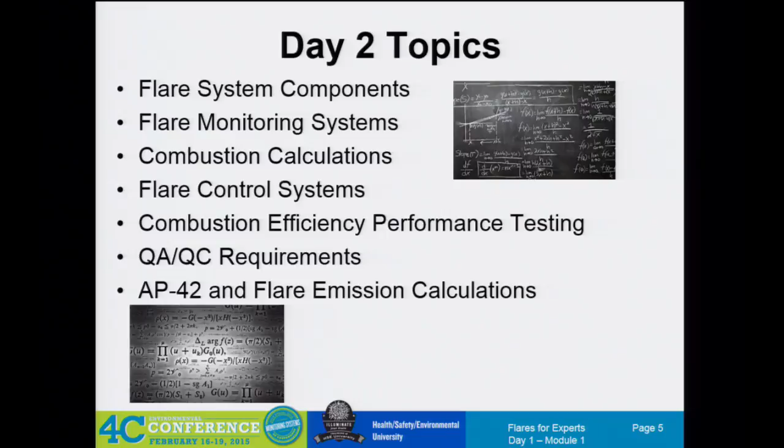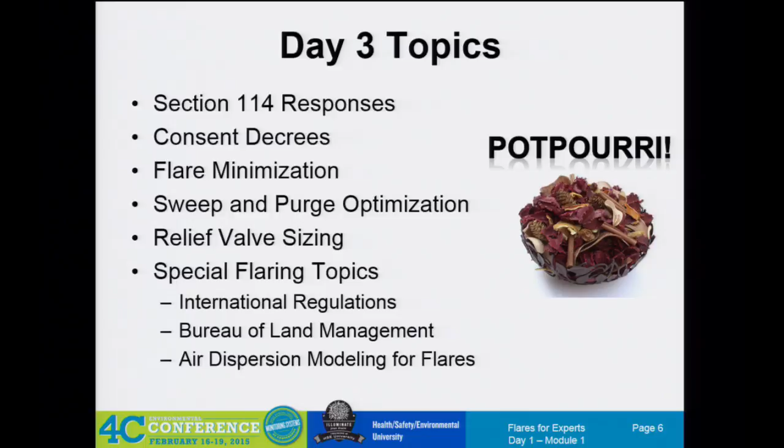Then the third day - well, actually Wednesday is going to be the big group. Thursday we come back, for those of you who can survive all of this, potpourri day, with a whole bunch of interesting things - some special topics and special speakers. Hopefully it'll be of interest, and should be a fun wrap-up day.

Long time ago in a galaxy far, far away, we used to burn in the pits. Some plants still have a burn pit. We've seen a couple - they're rare in the U.S., but we do see flares in the ground. Maybe in the oil patch you see them more than we do. Maybe, Russ, as you're out driving around, some of the oil and gas sites have flares kind of buried or quasi-buried.

But in the good old days, we would torch off things just to get rid of the product, the material. And everybody circles back to that word: safety. It's almost like safety is the ultimate trump card. For those of you who play cards, if you use the word safety, it's almost assumed that you can't touch the flare.

At the plant level, we hear that all the time: don't mess with my flare, it's a safety device. And then you start asking them questions about their most important, critical, don't-touch-it flare device, and they haven't got a clue what their flare device does, or how it was built, or why it was built, or under what conditions it could sustain itself.

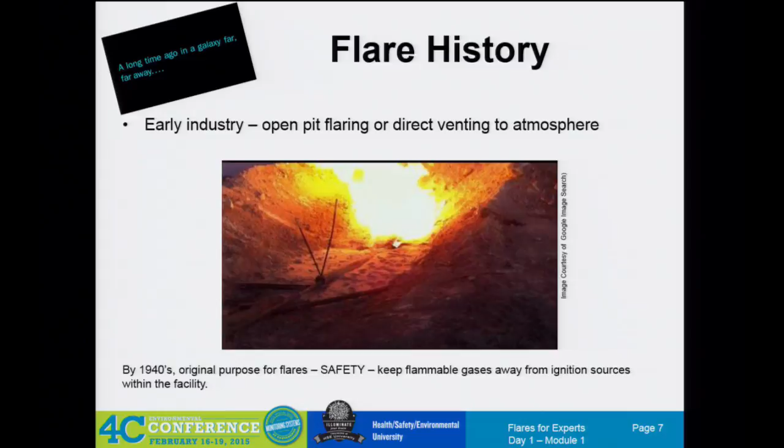So if it's so important, why don't you know more about it? It's a little jab, right - a little jib-jab both ways. But back in the good old days, instead of venting things to atmosphere, let's burn it off in a safe location - makes perfectly good sense.

Everybody loves the flare when it's big and burning, and it's there for that emergency case. It's this low flow condition that everybody really wants to have more interest in, and that's what we've been studying and talking about for quite some time.

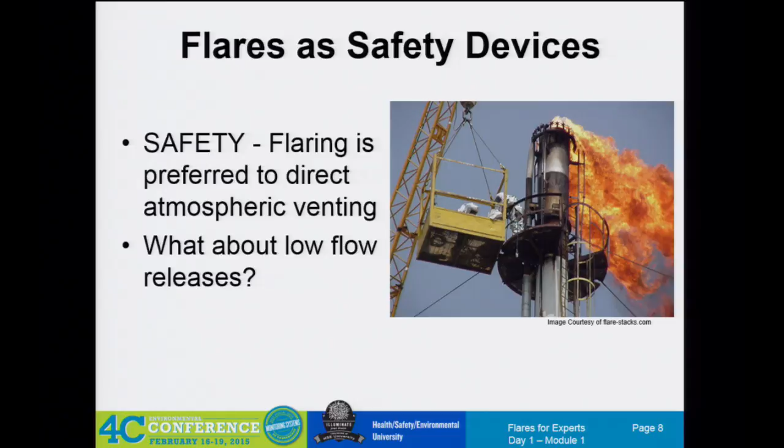Have you ever seen Jiffy Pop popcorn? That's what comes to mind every time I see that. Yeah, it's pretty horrible.

So why do people flare? There's a whole bunch of great reasons, of course we know this. And we want that flare for very large volumes at a very fast pace.

Some of the ethylene sites we go to, they add the catalyst, and they don't want that reaction to go out of control. If they over-add the catalyst or something gets crazy, they want to dump that entire volume of that reactor in like 4 minutes. Can you imagine - thousands and thousands and thousands of pounds of material safely combusted at a nice distance in 4 to 7 minutes.

So huge volumes needing to be directed quickly - there is a purpose for these ginormous, drive-a-semi-truck-or-pickup-truck-through-size pipe flare headers. They do serve a very valuable purpose. Controlling them at the low flow rate is obviously a huge challenge to us.

And what's really cool too is to go back in time. This group is a great group because there's a couple, one or two gray hairs in the room, so we kind of remember the process.

Some of us remember how we got here, and it's kind of important to keep talking about how we got here for the new folks who joined the team who don't know how we got here.

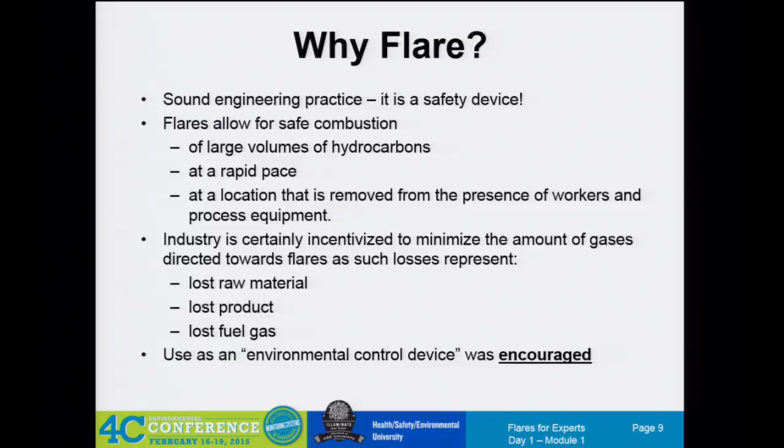Using the flare as a control device was hugely encouraged. Remember that? We have small, low-flow streams, hydrocarbon. We don't want to vent them to the atmosphere. Where am I going to put them? I don't want to put a control device on every single little thing. I can't repipe the entire plant, so let's just put it to the flare header. So over the years, we have encouraged, and our rules have encouraged, the use of the flare for these low-volume, low-pressure destruction ideas.

So how many of you have gone through some of the items on this list before, gone through some of these studies? Some of you participated in these studies, right? So we get to give credit where credit's due. This is really a fun thing.

Now, I guess as a flare expert, you really ought to familiarize yourself with what happened in the 80s. We don't have time to go through all of these, but they're wickedly cool to read because we start seeing words pop up in their executive summaries or reports that show up in other places. We see words like flame stability. What is a stable flame? Seeing those words as they're used, how they're described, and then what EPA's current expectation is to maintain a stable flame. Why do they say that? Because it shows up in the words used to describe these studies.

A couple of them that everybody who has been through this before knows: Siegel. I give the reference down here. It's written in German, so unless you have somebody on staff who can translate it for you — I know Clean Air has a German, we have a German, so it works out perfectly. It's Siegel's PhD dissertation from Germany, from Karlsruhe University.

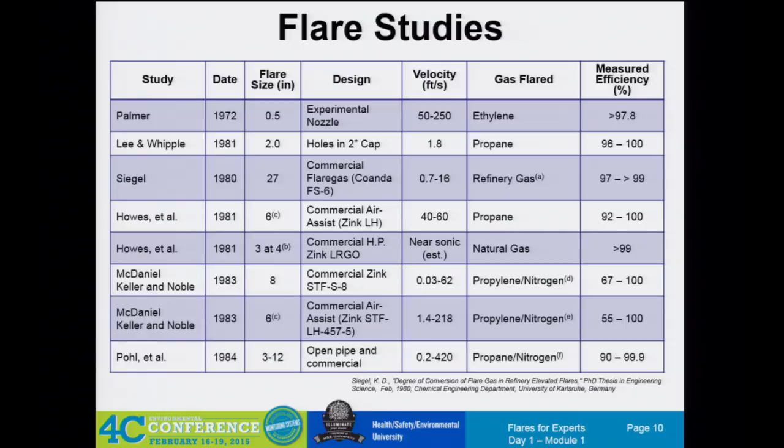Those of you who haven't had the chance yet to meet John Pohl, he still comes to conferences. He still speaks every now and then. He's an awesome individual. If you ever have a chance to meet him at AFRC or some other conference, that's usually where he speaks the most, right? AFRC. Really nice gentleman. He's quite knowledgeable. You should all take the opportunity to meet him while we all still can, right?

So here's a study that Mark McDaniel did back in 1983. I like showing this one slide because somebody else is going to show you this slide. And that somebody else is an EPA enforcement officer, Robert Parrish or Pat Foley or somebody else from one of the regional offices. You will, if you're into enforcement, this will come across your table. So I just want you to see it before, yes?

They were all respectfully invited, and we actually had a couple of them say yes, they would speak, and they gave us a yes, and it's all been withdrawn. So anybody, we're open and honest here, right? We have a couple state folks here, but we have nobody from EPA here. They have this funny, I don't remember this rule ever happening in the past. Maybe it's not a rule, this behavior. The behavior being, if there's a rule out for public comment or public notice, they prefer not to present on those topics during that open comment period.

Because the law says I'm only allowed to take public comment via mailing in your public comments or at a public hearing, right? And so this is a venue that's not a public hearing, so they're afraid they're going to hear our comments and it may unduly influence their decision on a rulemaking endeavor. So we've had quite a few of them back out because of the Exxon Dow public notice that just came out Friday the 13th last week. So that's a bit disappointing, unfortunately. I don't remember it being like that in the old days, but oh well, times change, I suppose.

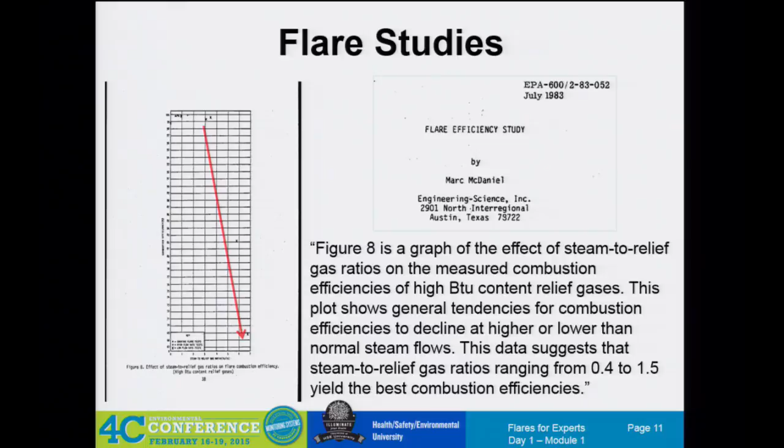So here's where we find some of these interesting words that show up in the executive summaries of most of these reports. The EPA conclusion, of course, was that 98% number. Everybody needs that number. We needed a number so we could do permitting, right? We can't do a permit unless we can do our emissions inventory. I can't do my EI because I got to have what number am I allowed to pick? So we needed some allowance that allowed us to use 98.

And we start seeing these words of flame stability, stable flame operating envelope. It's unique to each flare. It's difficult for EPA to write a rule that mandates certain criteria for a stable flame because it's unique to every single flare and whatever the gas is.

You know what the definition in the Pohl report is for stable flame? The presence of a flame. Yeah, if it's lit, it's stable. Yes, people think about all kinds of weird definitions, but the definition that's used is that if the flame goes out, it's no longer stable. So that's all they mean by flame stability.

And yes, there is a great dependency. If you don't have a flame, your efficiency is just going to go to hell. I don't know why they had to do a test to prove that.

Yes, apparently flickering on and off, that was considered a stable flame. Some flames are not, some flames are. I know, and I'm going to show you a picture of one on the website. That'd be good. How do you show a picture of an invisible flame?

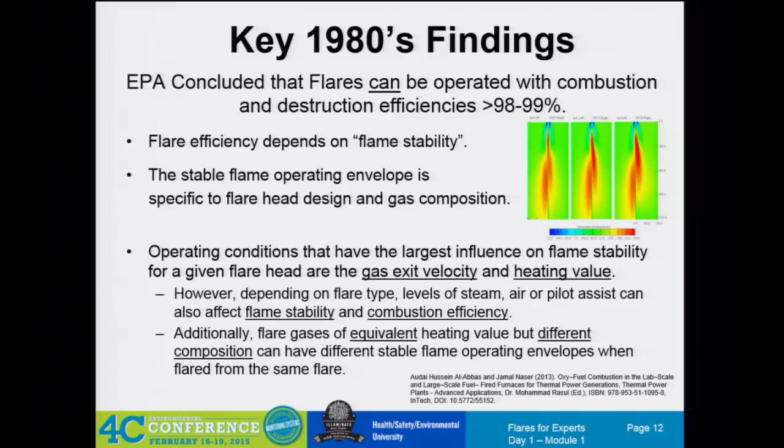All right, I'm just going to touch on these really fast. Anybody have a facility in California covered by one of these flare rules? Phillips does. Anybody else? They've been at the flare thing for a little longer.

And in fact, that's usually the feeling of comfort we give to the chemical sector, that this is not a new thing. Feel comfortable knowing that people have been playing with flow meters on these giant flare headers for a long time. People have been trying to do H2S sulfur analysis on flares in California since the late 90s. People have been trying to do GC gas chromatographs in the Houston HRVOC program since 2004.

So there are many hours of experience dealing with instrumentation and flow meters, and a lot of people immediately just fall apart over the instrumentation piece. So rather than retread all that ground again, it's fun to go back and see what other people have already created, so we're not recreating everything.

We do visit some plants, and the process engineer or project engineer feels he or she has to recreate a PhD research project on a flow meter. You can go through and evaluate the 13,000 flow meters and reconsider their pluses and minuses, or you can just trust us that at the end of the day you're probably going to end up here, and we can show you the 3 or 4 people who do that, which are the most common ones. So that was what we were hoping to do with some of this.

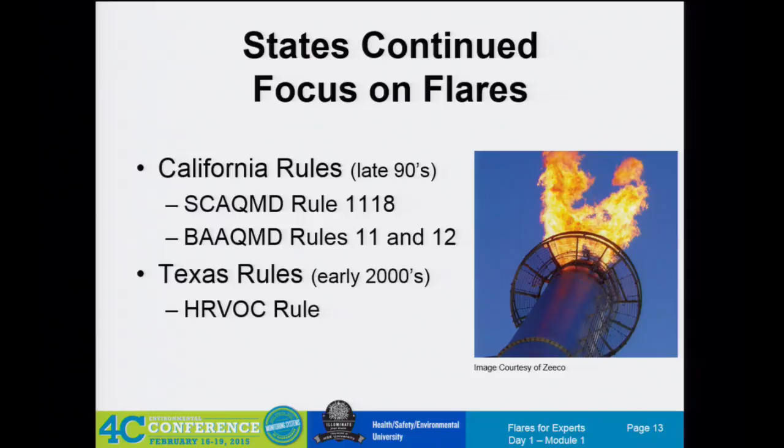And this is just the introduction, so just know there's a couple interesting state stuff. We're going to get into it deeper later.

Everybody has seen and heard about this story. Is there anybody in the room who does not know the story of Ohio? Everybody's heard this story, I think. This is the obvious case of over-assistance, over-steaming, 500-to-1 steam-to-vent gas ratio. The source of the emissions across the street at the school obviously are the flare that has no flame. It's hard to have combustion when there's no flame.

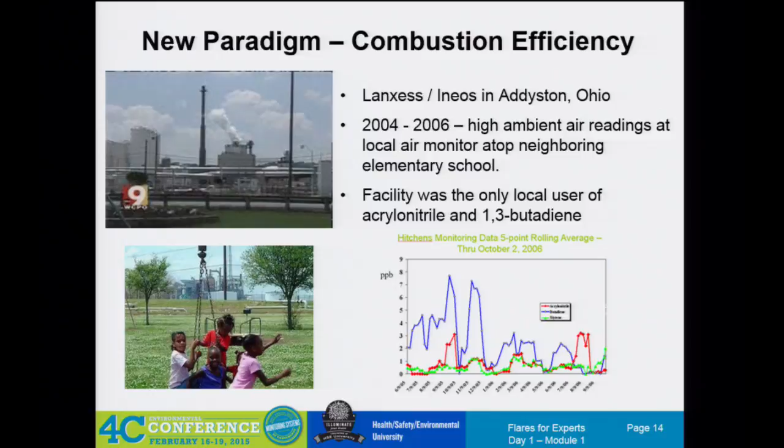How many of you have been to this plant? Has anybody been to the plant? It's in Region 5, Ohio? Okay, just curious. I'm just curious if it's still there or if they've shut it down and moved it.

All right, how many of you got one of these? Yay! So as we understand it, the enforcement alert came out in 2012. 300 of these were mailed out, and there's 150 refineries -143, 147, depends how you count them- got one, and about 150 chemical plants got them.

And we actually did a FOIA request to US EPA. I wanted to know who got the letter, because those are obviously potential clients, so I have nefarious purposes for wanting to know that. They wouldn't give us the list, which was very interesting, and the reason they would not give us the list is because of ongoing enforcement.

What? It's just a notice. If it's just a notice, it's to the public, right? Did you guys know that if you got one of these, you're already under the auspices of being- I guess you're presumed to be in the enforcement arena, which I thought was really bizarre. They would not share the list with us.

But we did get a little bit of information. 150 went to the refining sector, 150 went to the chemical sector. In the chemical sector, those 150 went to ethylene, olefins, basically all the olefins and olefin derivatives- anybody that had some olefin derivative type process production unit. So it wasn't the entire chemical industry, just a smaller select piece.

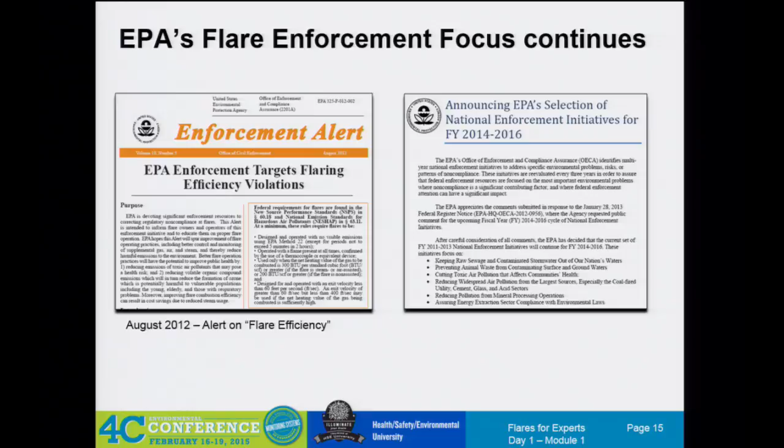There are what we call 5 flare consent decrees. A couple of these are CAFOs - that's a consent agreement and final order. And the difference between a CAFO and a consent decree, very simply, is money and time.

OECA can sign a CAFO with you if you can close out all of the recommended actions within 1 year, and the penalty amount is less than $297,000. Then you can sign a CAFO, which means I'm going to do all the same stuff, put in all this flare monitoring, do all these controls, but I'm going to be able to be done in a year.

And that has a huge advantage, right? Nobody wants a consent decree that lives on into perpetuity. Everybody wants to get out of their consent decrees that they have now. Nobody wants another consent decree.

So there's a lot of folks who are putting instrumentation in proactively, anticipating the fact that we might be down this flare CD discussion. And if that should happen, I want to be in a position where within the next 6 months, I'm going to program the DCS, we're going to have it ready to go. But for now, I have my instrumentation and my flow meters in, and I'm working on my steam control logic. I'm really close, because you want to be in that position to CAFO out rather than CD out.

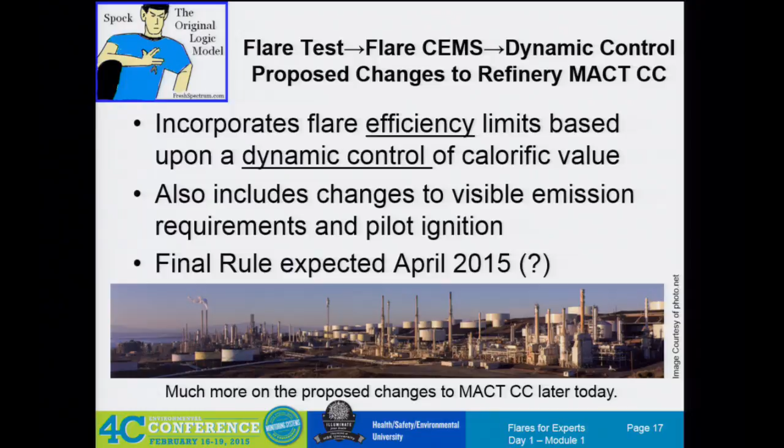So I think this is my last slide - thoughts. Historically, we were interested in wanting to send more things to the flare, right? Because of the regulatory setup, we were incentivized under NSPS VV, LDAR programs, to put things into the flare header, and we wanted to use the flare. And that resulted in utilization during low flow.

Everybody agreed that nobody wanted smoke, right? Have you ever heard anybody arguing, oh no, I want to be able to smoke my flare for 5 hours straight? Nobody hears that, right? Nobody wants to smoke their flare. So there's pretty much widespread consensus that nobody wants a smoking flare.

Everybody assumed that if I followed 60.18, I'm going to be fine. Everybody assumed that. You're not alone in your assumption. Everybody assumed that was the bedrock that we could all stand on.

Clearly there are flares, clearly we can come up with lots of examples. We've done it too. We have sites that don't believe us, and we say, no, you don't believe us? Come with us, we go to the control room.

We actually, with the production superintendent, with the unit process engineer, we're outside looking at the flare. There's a restriction orifice right there, right? If you turn off all the steam in the control room, you still have minimum steam to the tip, right? So it's safe. Trust me, we're going to do this.

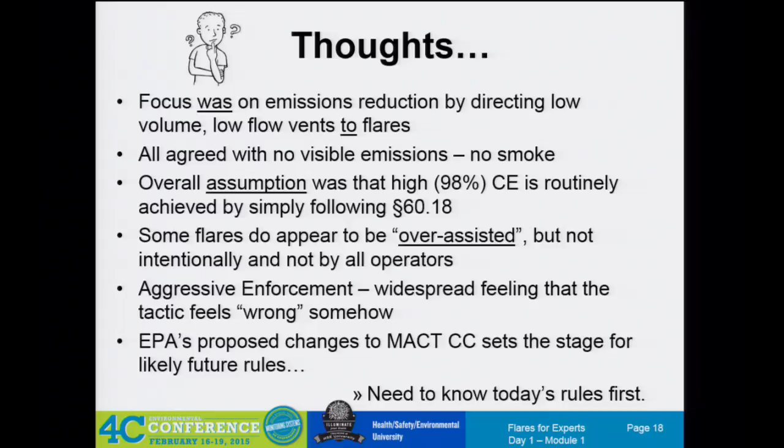Can we take a break? What time is it? We have 20 minutes until the official break. So do you want me to talk for 20 more minutes? I think that's the idea. All right, don't throw stones at me. Oh, sorry. Well, at least go 10 more minutes and then do the rush. There you go. Let's get the rush, as in the rush, kind of like the signing in this morning for this. Actually, we could let out a few minutes early just to let people go officially sign in. Anybody not signed in? There's a few people who haven't signed in yet. Yeah, so maybe give me a 5-minute advance warning. Wave your hand at 5 minutes till, and we'll let everybody out 5 minutes early.

All right, sorry, you get me 2 sessions in a row. What we tried to do is split this up every other session so that I can take a break and Herman can talk. By the way, anybody not have a book? Everybody's got a book. We gave Derek top billing here. Derek stuck top billing on the printing instead of Herman. So Herman, publicly, we didn't mean to slight you. It was an accident. Everybody loves you, Herman, and I think he'll speak next. Subpart A, I get the easy one, Subpart A. He gets the hard one, MACT and all the complicated stuff.

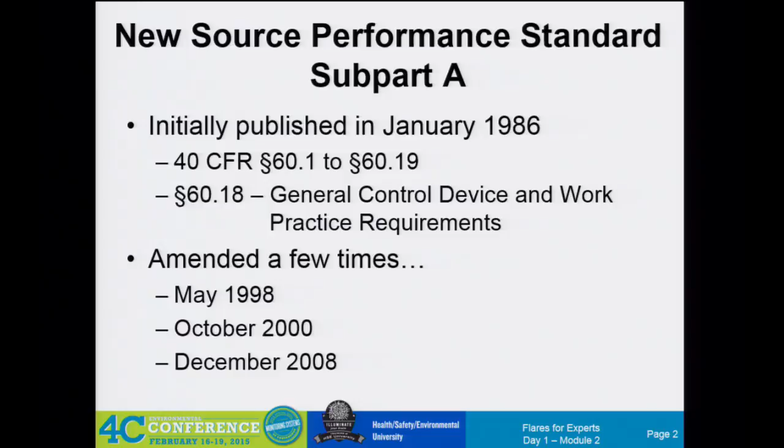All right, those of you who know, this came out in '86. It's a general control device work practice requirement. And I've had this pointed at me a few times - it's not an emissions limit, it's a work practice. So EPA has the opportunity to suggest we do certain practices: maintaining a net heating value, maintaining a tip velocity, those kinds of things. That's a work practice. Obviously it's been amended a few times, been changed, which I think is cool. That's what rules are supposed to do - we're supposed to keep up with how things change in this world. We've changed it in the past, let's change it again. The 4 pillars of flaring, or the 4 keys of flaring, whatever you want to call them - everybody probably has these on the tip of their tongue: no visible emissions, flame present at all times, adequate heating value, and a limited tip velocity. And then, of course, we get this cool little phrase they throw in: flares operated at all times that waste gases are directed to the device.

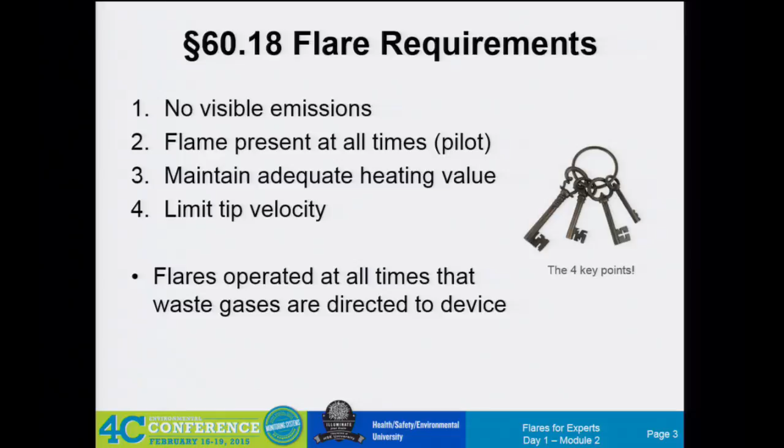Now, what's interesting is the only reason I highlight this last part is in some of the other rules - landfills, oil and gas upstream - they say this differently. It comes off a little different, and we'll show you these slight wording changes. In some cases it actually says a pilot flame shall be present at all times, and they don't give you this. So does that mean I have to maintain a pilot flame even if there's nothing happening at the wellhead or nothing happening at the oil and gas side? In Quad O, you're kind of left wondering, well, wait a minute - what if I'm not doing anything at this site, then everything's out of service? It's not a maintenance, startup, shutdown malfunction. Am I shut down? Do I get the MSS exemption anymore, or don't I? So a little confusion - it's kind of fun to point out when the EPA misses that in their writing.

All right, but these are the 4 things. I don't think that's a surprise to anyone. Now, this is where I'm trying not to be pedantic, and I'm not going to go through the rule line by line, word by word. It's not too bad on this one because it's only 907 words - we could go through it word by word because it's short.

If we do it for the first one, I'll feel compelled to go through it word by word, and we'll be here for a month. So in the interest of not being pedantic, as a summary: comply with the provisions, shall monitor the control devices to ensure they're operated and maintained in conformance with their designs.

Everybody in the consenting world, enforcement world, that's the hook. So that's why when they do a 114 letter, they're going to ask you not only for your operating conditions, your flow meter, your thermocouple devices, how often did the pilot light go out. They're also going to ask you for the design. What is the design? And that is a huge amount of fun.

You guys are just a barrel of fun because it's amazing how much information you have, and it's also amazing how much information some sites don't have. You have been bought and sold so many times, and your files have come and gone in a thousand different directions, and finding some of these things that John Zink built for you back in 1973, or whatever they built it—

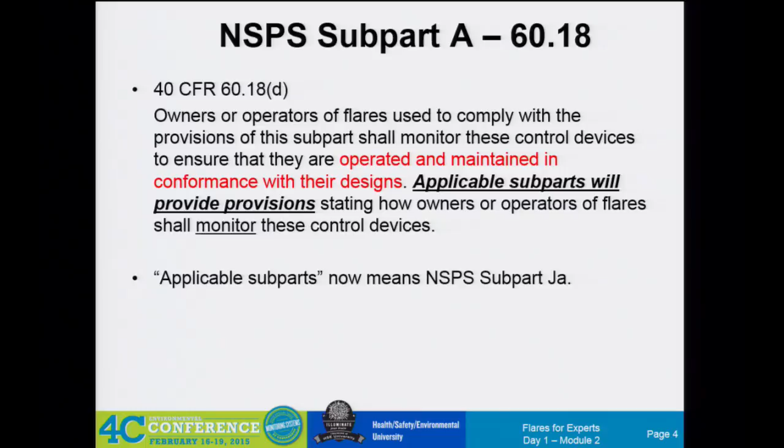As more applicable subparts come up, more NSPS come up—that's what we're seeing in Quad O, that's what we're seeing in the landfill, right, triple X. That's what we're going to probably be seeing in other things with the chemical sector. As rules come up, they'll probably change the subparts, not the basic. Maybe.

We're not going to spend a whole lot of time on MACT because it's a mirror image. I'd love to ask if anybody can think of a difference between subpart A MACT and subpart A NSPS. I believe they're written identical, but I thought I'd have a whole room full of experts. They're close to identical, but the wording is very slightly different. I don't think there's any intentional differences between the two, unless you found something. I haven't found anything. Well, it's good to confer with everybody to make sure.

But on the MACT side, it's going to bump you back. Same thing, all the MACT standards are going to bump you back to the general provisions as well. So rather than going through both of them twice, I'm only going to do it once.

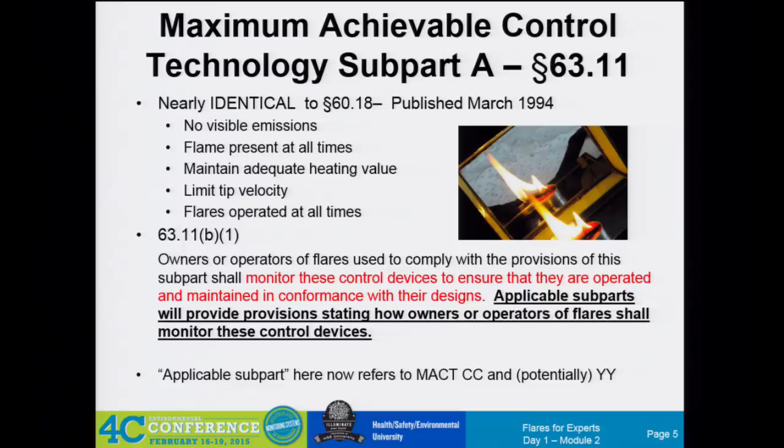Yay, isn't that great? All right, key number one is visible emissions, and this is where I get back to - I don't think anybody's fighting over this. Nobody wants that. No industry is hoping for the opportunity for these days to come back again. That's pretty ridiculous. So as far as we know, most people are not fussing over the visible emissions limit. There are a lot of curiosities about how EPA wrote the visible emissions standard.

It must be designed, it must be operated, no visible emissions. Think about that for a second. How many of you have unlimited steam availability for your steam-assisted flare? Meaning, you have a 0 to 100% smokeless flare.

100% flare capacity smokeless - I don't know very many unless you're a pressure-assisted ground flare. So I guess the point is, we have a lot of sites where we have enough steam, the steam goes to the tip, and it's for 10% of our rated capacity. It's for 15% of our rated capacity. It's for 23% of our rated capacity. So I don't know of anybody who has 100% smokeless condition during all operating scenarios of their flare. There's not enough steam - we would have to have how many boilers running concurrently in the background, just blowing steam out the roof.

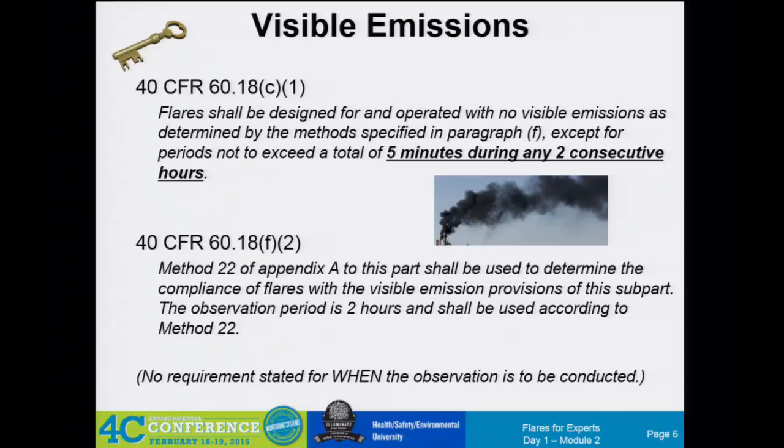And again, no percent opacity. The person doesn't have to be Method 9 certified to do a flare observation, right?

It tells you where smoke emissions are defined as occurring immediately downstream of the flame. Smoke occurring within the flame is not considered smoke. Here's a great one: if you get an inspector that asks you for this, just be ready, this should be the indication that you're in for a bad day. If they say, where are the 2 stopwatches? Right, where are your 2 stopwatches? Not using the computer and the computer video screen, or I'm using my iPhone and the video up there, and I'm just looking at it.

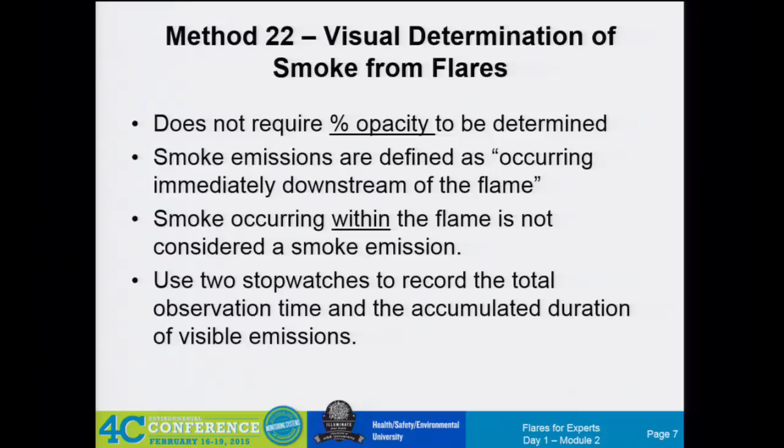When you mail in your smoking flare event, don't be surprised, a lot of attention on this. Thank you for giving us your smoking flare notice, could you please tell me, because you failed to tell me, who was your observer, and what was the start time, end time? Because a lot of those notices don't include that. And if you get an inspection where they come out to look, they may actually ask you, show me the stopwatches that you use. And the next part is, the person conducting Method 22 should be trained and knowledgeable.

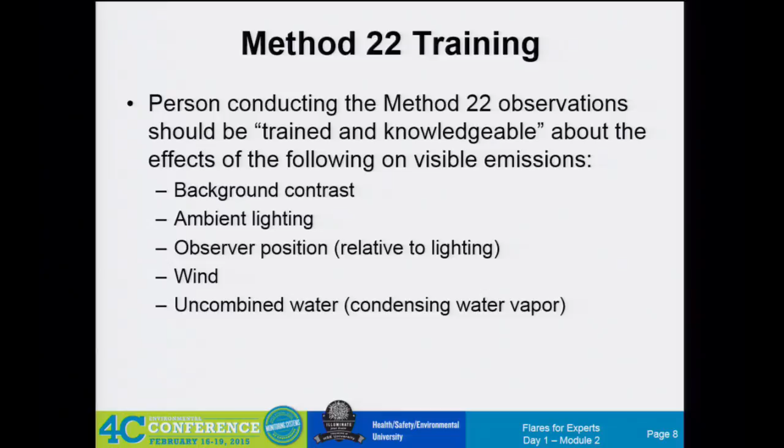Now, there's no requirement for a Method 9 class, no requirement for a Method 9 certification, but Method 22 says you should be trained and knowledgeable on these specific 5 things. And while you don't need a certification, Method 22 references written training materials such as these 3 things. Do you, at your plant, have this written up? For Method 22, who's allowed in your plant to do this? Just be aware that now that people are reading the rule with more interest and fine-picking every little word, these are what local inspectors are asking for, at least the finely tuned inspectors.

That should give you a hint on the degree of frustration you'll have for the rest of the day. All right, we're going to take a little break. We left off on Method 22, and I would like to wrap this up and move on to a couple other interesting things. So let's keep moving forward.

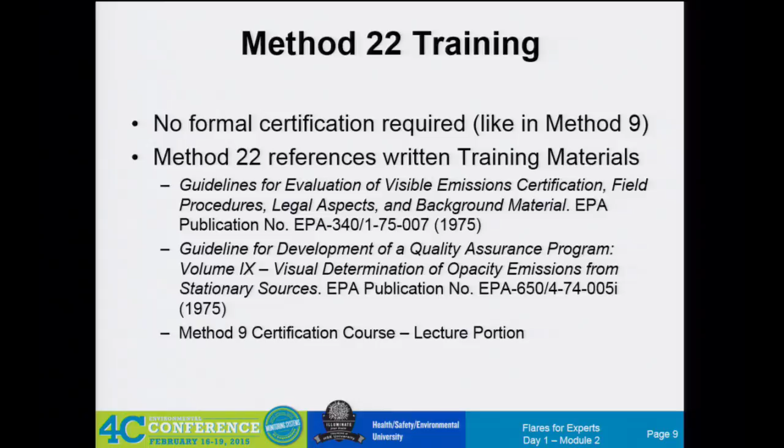Some of you have a Method 22 training program in your plants, and you may be the environmental person who gives it to every single operator. But we've also found a lot of plants who just don't do any Method 22 training. They do Method 9, they send you off, right? You get to go on the trip to somewhere far, far away. That's fun and cool, but you're not the one there actually doing the reading on the form that you mail in to the state, right? So interesting stuff that the agency is asking about.

Key number 2 is flame presence. And boy, this is really fun stuff, because the words are so important, and yet these words are so fraught with confusion. If ever there was an opportunity for the agency to say something better, this is a great example of where the words just got lost somewhere. Flares shall be operated with a flame present at all times.

Why? Because without a flame, you don't have anything. You got to have a flame. It seems so obvious. But how could something as simple as the plain English reading of 'a flame present at all times' - and you drive by and you see a bazillion flares, it feels like, with no flame at all. You don't see anything. That's why it's really important to have that little disclaimer: at all times when waste gases are present, or when waste gases are being directed to the flare, right?

So that's a nice little thing to have in the rule. But what about this next little thing: 'as determined by the methods specified in paragraph F'? So paragraph F, as we all know, is in regards to the pilot flame. So we all know that for decades, we have always said this, and it's almost like the choir, same song, second verse, a little bit louder, a whole lot worse. It's the pilot's on, I have a flame. That's all I got to have.

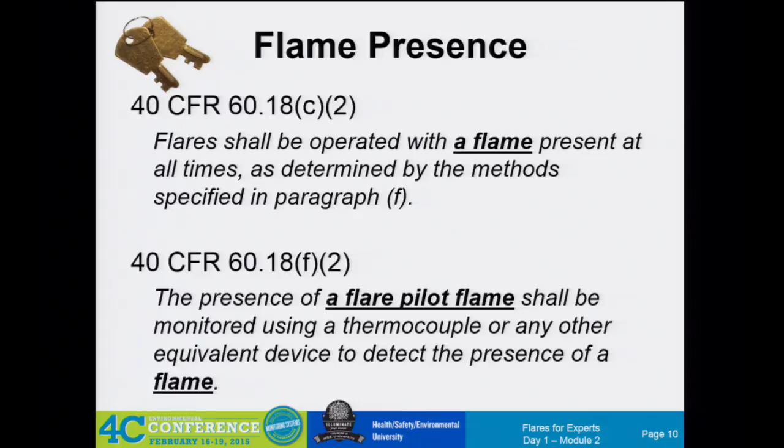All right, so we talked a little bit about this, infrared detectors. What do you do when there's a steam plume obscuring the line of sight? And that goes back to the frequency thing, right? How often am I supposed to, the presence shall be monitored, at what frequency? So what happens if during the morning hours when the steam plume is there and I can't see it, but I saw it later on in the afternoon at 2 in the afternoon, am I out of compliance?

The word continuous is not in there. Now what's interesting is the word continuous is in many of your permits. Now that's an interesting dynamic, right? Over the years, we've all assumed that the pilot has to be continuous, and it shows up in just about every Title V permit all across the nation. The word continuous is there.

So you are bound to a continuous obligation, but it wasn't because 60.18 told you to do it, it's a deal that you accepted. So in some places, failure to have the pilot data continuously may be a state violation, wouldn't be a federal violation.

Enough data to show those kind of weather conditions makes infrared detector not very effective. Has there been an actual study on that? I don't know about that, yeah. The reason I'm asking is there's a substantial amount of even the pilot flame going on there, and it may have a chance to penetrate some of that fog and steam and all that. But I just don't know what level it's going to cause a problem, so I'm asking if anybody has experience actually seeing it.

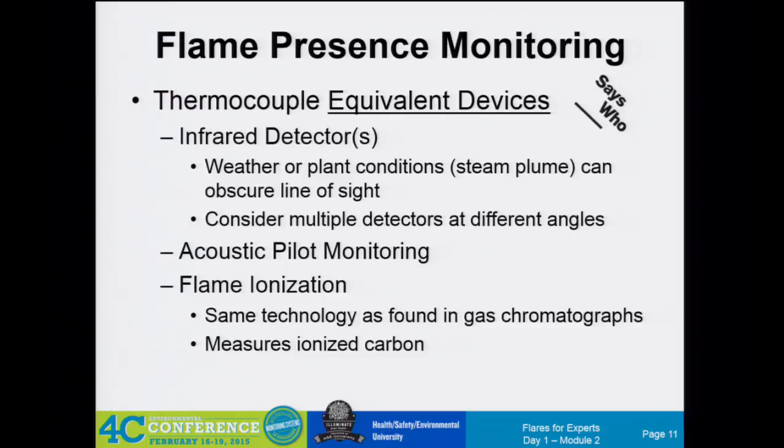How many of you guys triangulate or use multiple cameras? Of the infrared, yeah. Yeah, most sites that do this have two. Unless it's a little flare. You guys have just one? Well, we started with one, but then due to various interesting issues, we went to two - a cheaper version, just to detect the temperature and nothing else, a threshold, you know, on or off.

Now we're going to enter another interesting arena - another little trivia question. What type of flare is not subject to the net heating value requirements? So we're going to start talking about the net heating value, and there are some interesting things. We have the experts in the room to help substantiate how all of this came to be. There are some flares that do not require net heating value minimums, right? Interesting. Here we go - net heating value.

This is as it looks today. So we're not going to show the original version, then the DuPont study, hydrogen flare version, and then back again. So it reads a little funny.

But the owner operator, you have a choice, and we love choices. Either the heat content in paragraph II and the maximum tip velocity in C4 - that's one set - or the requirements in C3I. Now, of course, if you were in English class writing this, you probably would have offered option I first before option 2. But here we offer option 2 first before option I. I have no idea, in the way of the words, that's how they came out.

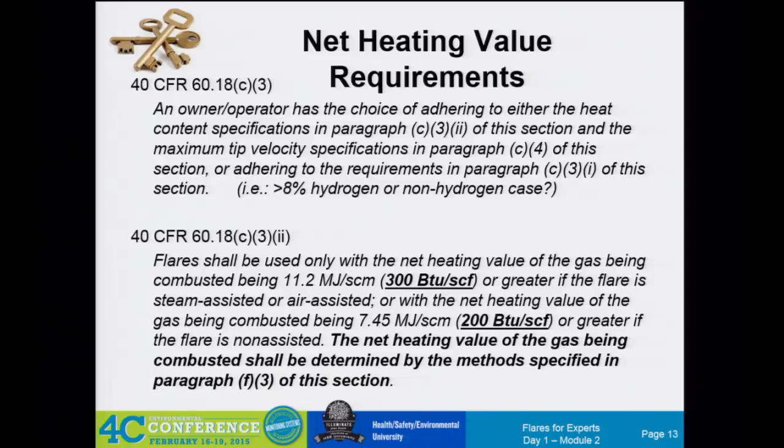So the net heating value of the gas being combusted is not steam assist or purge assist as well, right? The purge gas - steam's not being combusted. Right, so that's interesting, and I'll show you why. And the why is right here.

You have to go back and use this funny little calculation, the net heating value of the sample, or the net enthalpy per mole of what? Off gas - yay, that's my word. Off gas does not include tip, so I'm not taking a sample of the gas at the tip. I'm taking, according to their definition of what HT is, the net heating value of that sample, per mole of off gas.

So you're saying the purge gas is not off gas? Right, some people do not. Some people add the stack purge gas after - usually it's added after the process entrance to the flare. I love the word you just used - usually.

If you have a seal drum, you've got to have purge gas. But you also need purge gas in the header - the sweep. So that purge gas would be in the off gas, right? Maybe. I don't know.

I don't know, Bruce. It's a tough one because not everybody has a water seal. Not everybody uses purge gas. Some people use their sweep as their purge.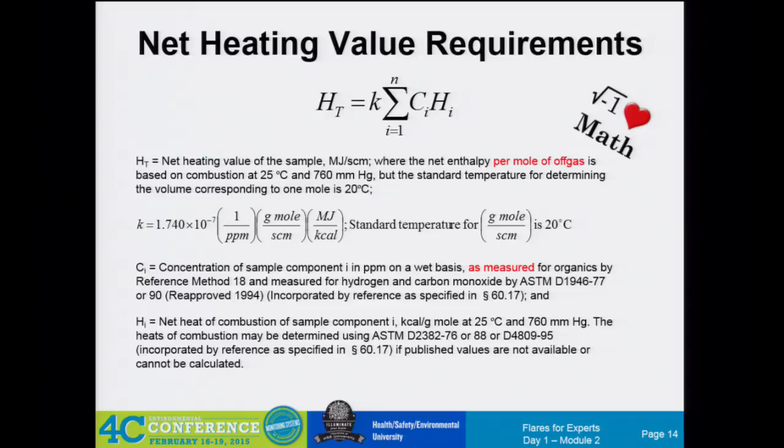All right, net heating value. Of course, what number do you guys like to use at DuPont for the net heating value of hydrogen? Is it the 274? There's a couple of things that bounce around, okay?

If you don't meet the hydrogen special case, then of course we talked about non-assisted and steam-assisted. We talked about this one-time performance test. It doesn't specifically say thou shalt do a performance test on every flare - another NSPS has to ask you to do that.

And of course the most famous one is anybody with an LDAR program doing VV or VVA, right? That's like the automatic welcome to the party. And what's always fun is when - when did that flare get invited to the party? I may have built it decades ago, but when did it become an applicable facility?

In all NSPSs, the flare is never an affected facility, is it? The unit is the affected facility. So if I have a flare and it's in some process unit and it's subject to NSPS triple D, life is great - I've got to test my flare according to triple D, right? That's no problem. What if I build another unit? It's also triple D, it's a new affected facility. Do I have to go back and test that flare over again if I've combined the sources? Would everybody agree to that?

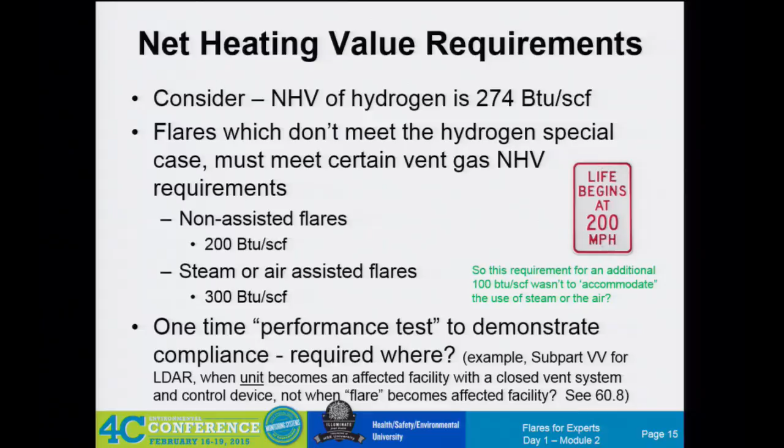Okay, now we're going to touch a little bit on exit velocity before we come back to our trivia question again. Exit velocity.

This is where it gets complicated. And it's complicated because there's a different exit velocity equation for different cases. So you get choices, and you get to move down this little chart.

I guess you could just always be less than 60 feet per second, and life is happy, and nobody will ever question you. If you go above 60 feet per second, there's a way to do it if you have more than 1,000 BTU per scuff, and some of you who are in that game have BTU analyzers and some other things usually. In the old days, we didn't even have the analyzer. We just got the authorization without an analyzer.

Texas is probably the most consistent in that for new flares being built, it seems like they're adding the BTU analyzer to every flare being built, even if it's outside of the HRVOC area. We did that with MSS rules too. Yeah, it's pretty consistent. So if you had to pick a state, the one with the most BTU analyzers would probably be Texas. I don't know if Louisiana is doing that as aggressively or not.

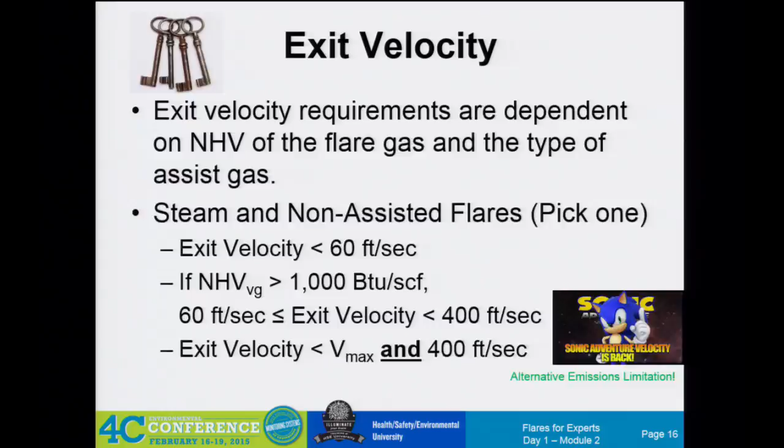So then you have this middle, or you have this Vmax calculation, right? So those are the... I'm going to just show you. There it is. So maximum permitted exit velocity, steam or non-assisted, you get to follow the log rule. If you have high hydrogen flares, that's over 8%, they have their own cool little calculation. If you have an air-assisted flare, you get another Vmax calculated differently.

Then the question is, on that Vmax for an air-assisted flare, how do you figure out the exit velocity for an air-assisted flare with the air coming in? How do you figure that out? The combined tip velocity. Same thing, awesome question.

Because nobody's doing it, right? With fan speed or fan curves. A lot of people have played with those with very limited success. If you have a success story, we'd love to hear it. Variable frequency drives seem to be the way that most people are going, and they're just getting rid of their one-stage, two-stage air-assisted flares. But even then, what value do you use for your air assist rate?

The real irony is none of this matters, because there's not a shred of evidence that high velocity has anything but a positive effect on combustion. Yeah, which is the pressure-assisted issue, right? Exactly. The more motion you have, the more you induce ambient air into the flame, and it actually helps. All of the testing thus far has kind of shown that. I don't know, other than history, why they're sticking to all of this. That's all it is, tradition.

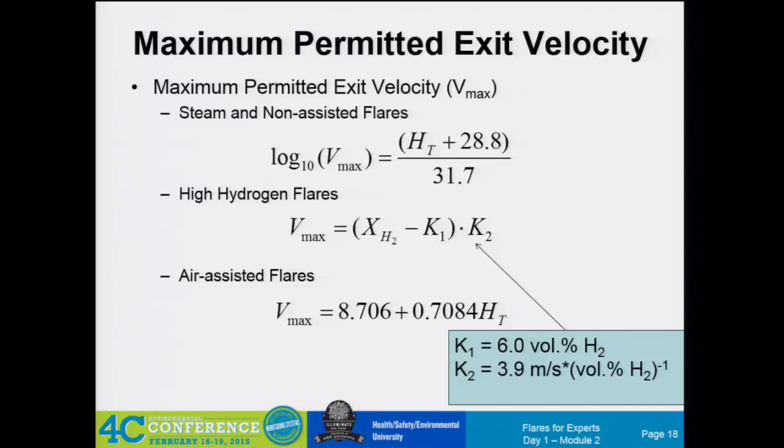Yeah, how did that happen? So we thought we had a way to do it back then, and it was easy, and now it got complicated. What used to be an easy system to ask for has now turned into this ginormous AMEL thing that Herman will show you Wednesday, I think.

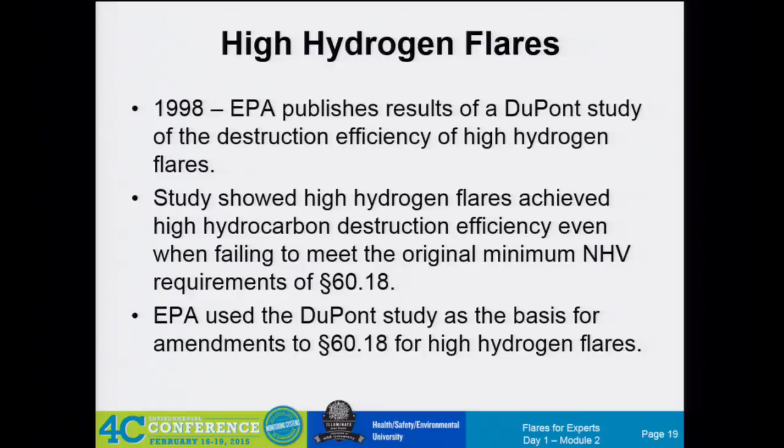All right, high hydrogen flares, 1998. I think everybody knows what happened. The most important thing to me, again, is the process. There was a process, and we collaborated to get high hydrogen flares over 8% exempted. Anything over 8% high hydrogen doesn't have to meet the net heating value requirement.

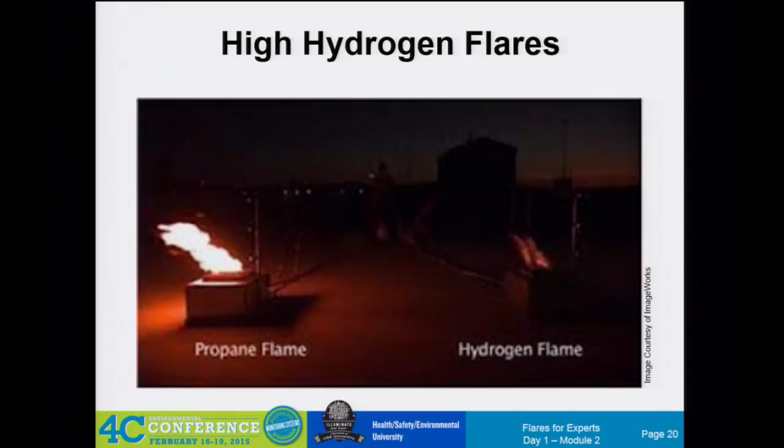This is a really bad picture, probably doesn't show up too well here. Propane flame, hydrogen flame, same flow rate if I'm not mistaken, blah blah blah, it's everything you know. The hydrogen flame doesn't have a visible flame until you look at it at nighttime with special secret decoder glasses or something, I don't know. But it doesn't mean that it's not there.

High hydrogen flares have their own equation for maximum permitted tip velocity. So non-assisted, high hydrogen, more than 8%, have to have more than 3 inches. And of course that came because that was the dimension that was tested. Does that mean a 2-inch flare is not good? No, it just means they didn't test a 2-inch flare, they tested a 3-inch. Designed and operated, this is where that magic 122 comes from, it follows its own little curve.

Here's a fun thing, 60.18 allows that flare, as described above, high hydrogen, non-assisted, greater than 8%, as long as you meet that tip velocity, no net heating value requirement. Essentially, you replace the net heating value or the BTU content with hydrogen content. You've got a hydrogen requirement instead of your BTU.

So let me throw out something and see what all the experts think. I have a refinery. My refinery has a hydrogen unit. That hydrogen unit makes more hydrogen than I need. Uniquely, I don't need all the hydrogen. I'm going to purposefully put, continuously, 10% hydrogen into my non-assisted flare.

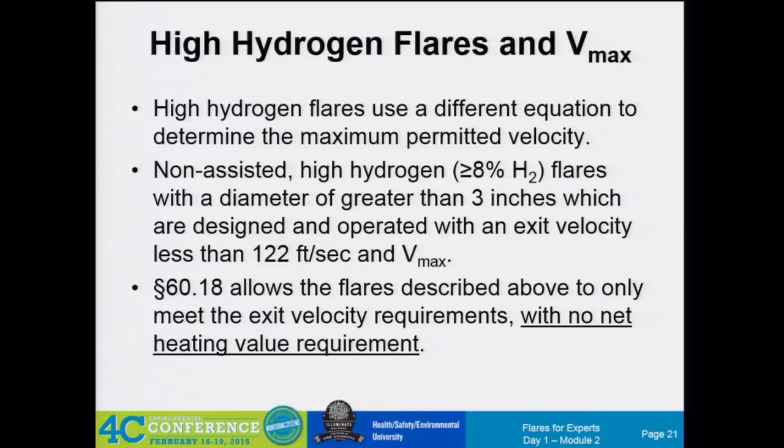If you turn it all the way off, then maybe you violate your warranty. So this is my one-slide teaser to build up Herman.

In his talk, alternative monitoring plans. Obviously, subpart A contains this provision in 60.13 that says you can petition the EPA and suggest an alternative.

Those of you who have gone down this road are probably all frustrated over what words we're talking about. Are we asking for the waiver? Are we asking for an equivalency demonstration? Am I asking for an alternative monitoring plan? What am I asking for? Another part of the rule is going to ask for an alternative means of emissions limitation. Those are the 4 federal words.

So what you're going to see is that when we did the thing for Exxon, we asked for everything because their rules were so confusing. We didn't know what to ask for, so we asked for every single item in the list. Of course, they picked the most stringent, which is the alternative means of emissions limitation, which requires a Federal Register notice.

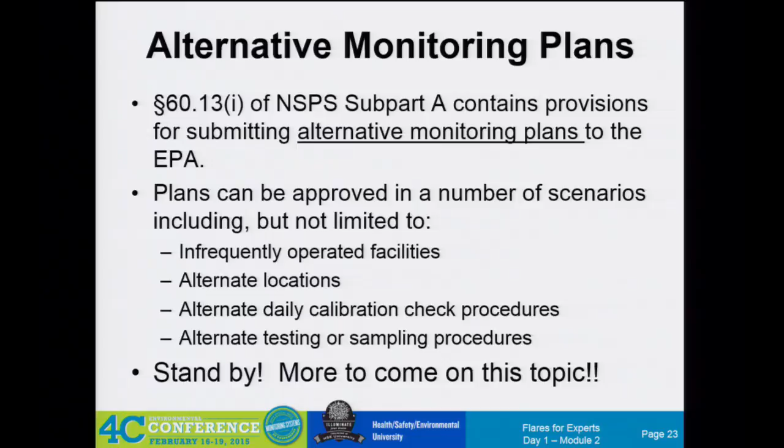All right, really fast, more NSPS Subpart A stuff. Hard to believe Subpart A is lasting so long. Don't worry, the rest are a little shorter.

Semi-annual excess emissions reports—I think everybody knows about these. It's not just the excess emissions, it's the monitoring system. So what we're seeing now is in Ja, for the refinery sector, they have to do a semi-annual report. There's a linkage back to 60.7 for what that monitoring performance report has to include. So just remember, it's not all in Ja, it's Ja and A.

And the performance testing is only required if required by another NSPS subpart. By the way, the updates to Ja clarify that yes, the flare needs a Ja performance test. So if you weren't busy enough between now and November getting your flare management plan and everything else done, your Ja flare is now an official affected facility in November. It's official—you now have a date clicking for doing a performance test. Many of the refinery guys, I think, have missed that. Great opportunity for you if you're a stack tester.

All right, can I be done? Anybody have questions for me on the intro? How's that? My heavens.